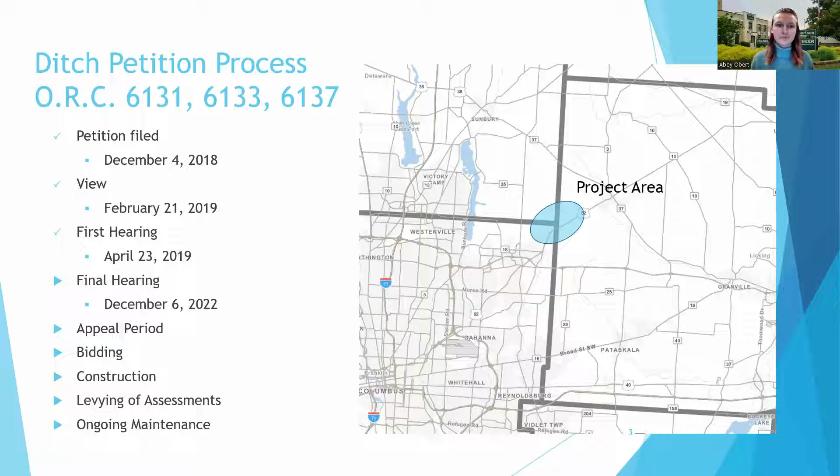So at the final hearing, the Joint Board is going to hear all the information, the final report, and the plans submitted by the county engineers. When this process started, Franklin County was appointed as the lead county on this, but all 3 counties have had equal input into this process. At the final hearing, landowners may offer testimony.

So it is in person, but there's also a virtual component. It is being held in the Franklin County Commissioners building in the Commissioners room. So you are able to attend in person and speak to the commissioners, or you can do it virtually, either way. After hearing all the information and the testimony from landowners, the joint board will vote to either approve the improvement, including the plans and the assessment schedule, or to dismiss it altogether.

And it's based on 3 factors, and these are all written in the Ohio Revised Code, section 6131. Is this project necessary? Is it conducive to public welfare? And do the benefits outweigh the cost?

So going into the components of the final report, this has been submitted to the joint board, and it's also on our website. So if you wanted to, after this meeting, go through and read what we've written, it's on the Franklin County Engineers website under public meetings, so you're able to do that.

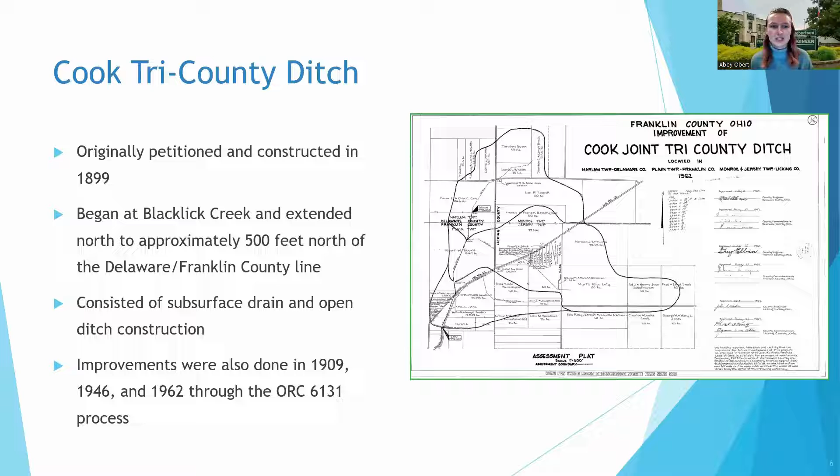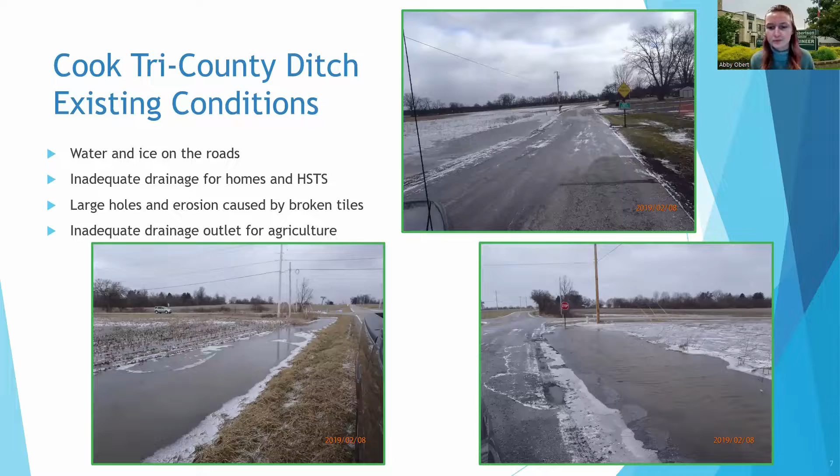So we'll get into what the plans are for each part of the project. Part one is pretty basic, including some open channel maintenance, some rock line channel construction, and the clearing of brush and vegetation. I've broken down the cost estimate for part one: the actual construction of the project is around $20,000. Project administration, survey, and engineering - this includes the design cost for part one - is around $6,500.

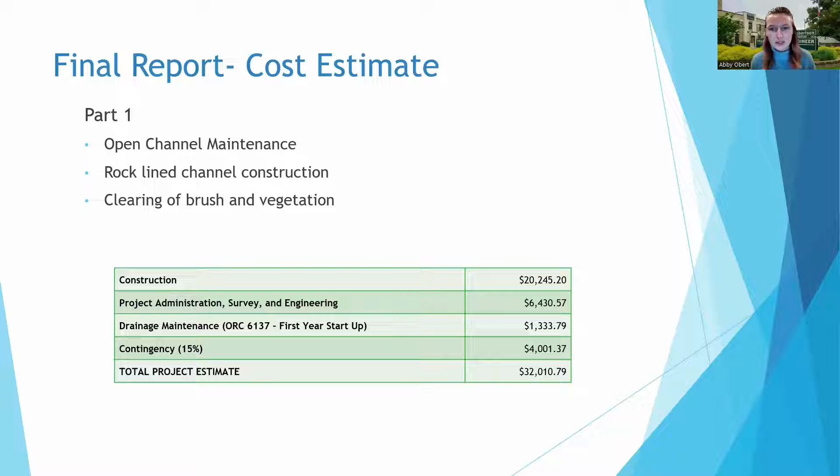For the second part, it includes surface drain reconstruction, subsurface drain tile installation, and the clearing of brush and vegetation. We're still looking at the same breakdown of cost: construction at $153,744, project administration around 27 or 28,000, the drainage maintenance funding set up at around 9,000, and then the contingency. So we get a total project estimate for part two at $217,997.02.

And from that, we have Delaware County being directly assessed for $11,405.70 directly within the county line road right of way - so the improvements happening within that right of way, Delaware is being directly assessed for. So the amount that's being assessed to the watershed is $206,591.32.

Just making you aware that Delaware County is being directly assessed for this, but since they are a public entity who owns land within the project, they are still being fairly assessed the same way that all of you are as residents. So while they are being directly assessed, they're also paying their fair share throughout the entire project. It's not that they're just paying the 11,000.

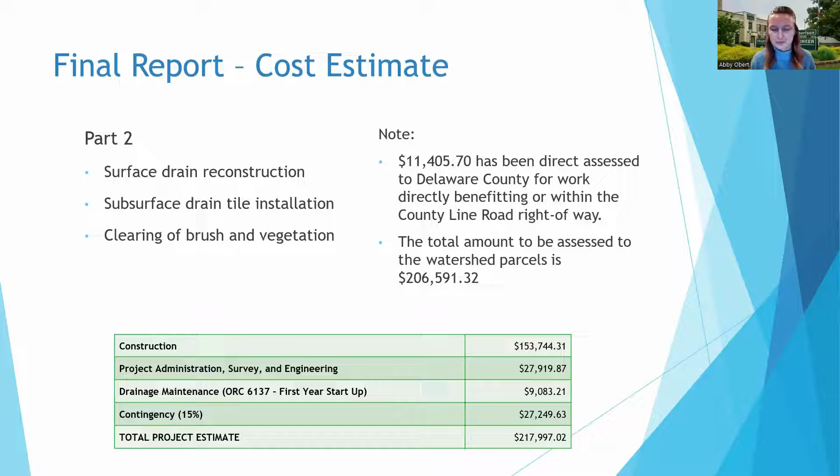And the same thing applies for Monroe Township.

So this is part three, the northernmost section. It includes subsurface drain tile installation, clearing brush and vegetation, private drive culvert replacement. Since part three runs parallel to Fancher Road, there are a lot of driveways where culverts will need replacement, plus road culvert replacement where we cross along county line, and then surface drain reconstruction.

As Delaware County was directly assessed, Monroe Township is also being directly assessed for work within the Fancher Road right of way. That is $8,500.80. So the total amount of the project comes out to $212,000, but the amount assessed to the parcels is $203,572.87.

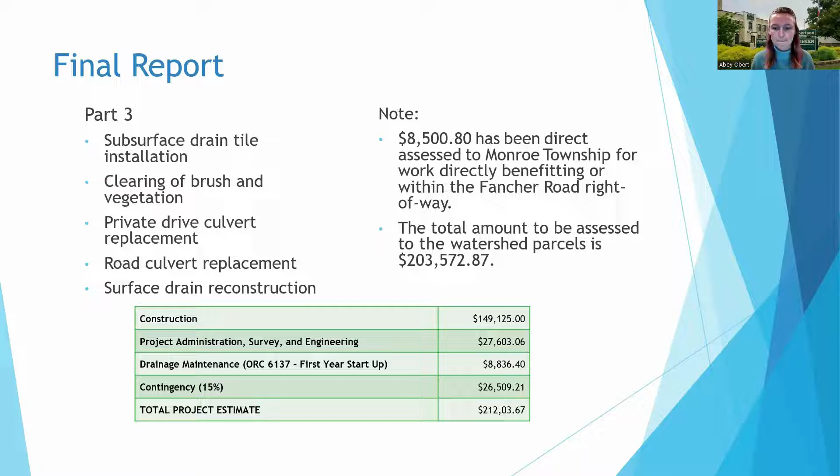So you're probably wondering how we come up with the assessments. Each parcel in the watershed is assessed a portion of the cost of constructing and maintaining the improvement. This is written in the revised code 6131 on how exactly we go about figuring out who is being assessed how much, but it boils down to just a couple things.

Property size, so how big is your parcel, and the percent of the system used. As I mentioned, people downstream aren't using the whole system, they're only using the most downstream end, whereas people on the northern leg are using the entire improved system.

Land use, so looking at whether it's residential in nature, agricultural, wooded, or impervious, including the right of way as well. And then how much benefit is actually being received from the project.

Assessment rates are actually up to the commissioners to decide, but we always recommend two semi-annual installments for up to 30 payments. That means the assessment total is being paid over 15 years.

And then there's the maintenance assessment that comes in under revised code 6137. That covers maintenance associated with the project.

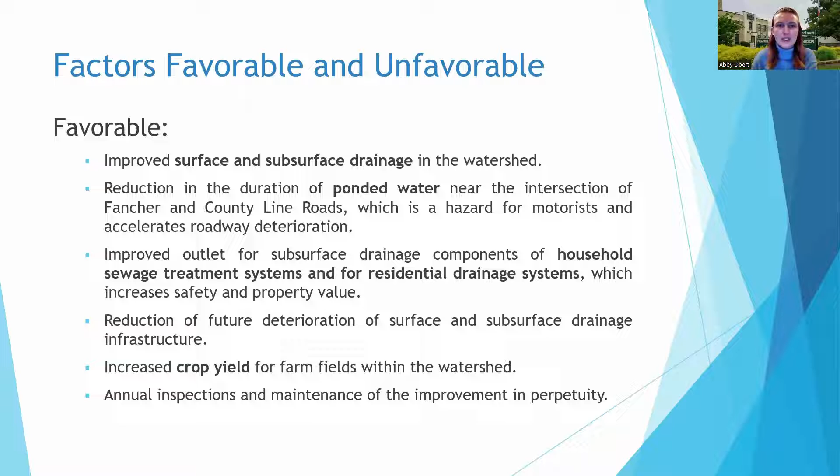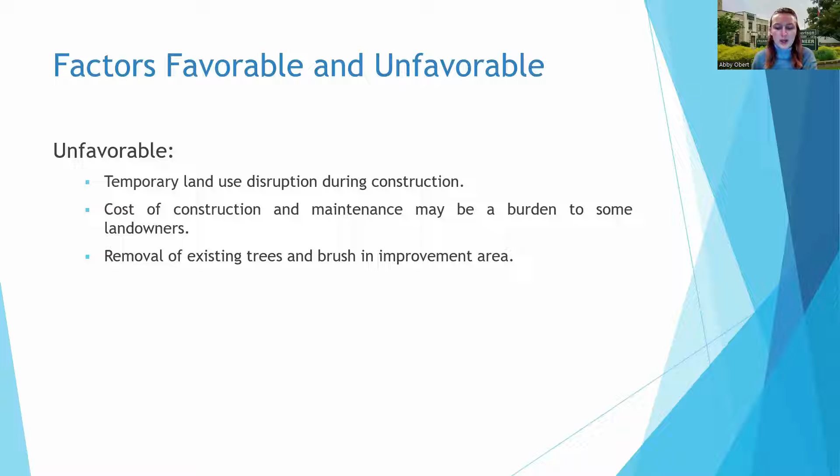Some unfavorable factors for this project would be the temporary land use disruption during construction. The cost of the construction and maintenance assessments may be a burden to some landowners, and would also include the removal of some existing trees and brush in the improvement area - going back to some of the scopes from the parts of the project.

Back to the benefits versus costs. A study from Ohio State determined that improving subsurface drainage increases corn yields by 24 to 39%, and increases soybean yields from 13% to 46%. So the improved drainage could lead to a potential average increase in profit of around $111,000 per year.

Increase in residential properties, communities with good drainage tend to have higher resale values. For new construction, developers spend on average $8,700 to attain adequate drainage. We have 71 residential parcels in the watershed, so this is a potential benefit of $617,000.

I keep mentioning the home sewage treatment systems. In order to replace a system that fails, it ranges from around $15,000 to $25,000 — that's a local price. Inadequate drainage can deteriorate the condition of your system. There's also environmental degradation, and quality of life and positive neighborhood perception of having a good drainage outlet and not having your property flood.

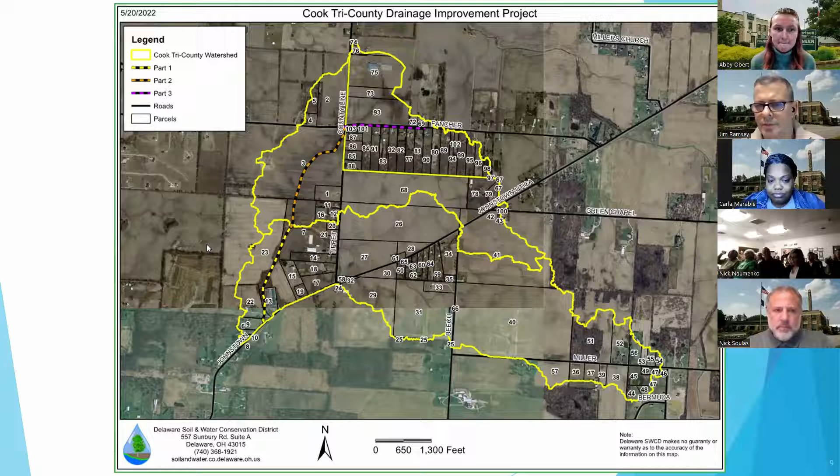So if I could say something here for a minute. One of the things to keep in mind is, and I apologize, I can't really hear clearly what everybody's saying, but I can get the general gist of what you're saying.

It's important whether you're in favor of the petition or against the petition to come and speak to the commissioners when they have the hearing, or to send your comments in writing and they can be read at that hearing. And you can participate in person or virtually.

Some of the things that I heard concern me, I'll address. The petition process is for private property owners to petition the county commissioners to make a drainage improvement. We didn't come to you and say, hey, we want to make this drainage improvement. Somebody came to us and asked for a drainage improvement and asked how they could do that because it's private property. So this is the process that's available for that. We told them that, and we are fulfilling our responsibilities under that law. So we're doing what the law says we have to do under that process when a private property owner wants to petition the county commissioners for that.

I can assure you that nobody on the staff of the Franklin County engineers, or in Delaware County, or in Licking County said to anybody that a petition was going to happen and the counties were going to pay for the improvements through the petition for that. That didn't happen. Not anyone on any of the staffs of any of those counties said that, I can assure you.

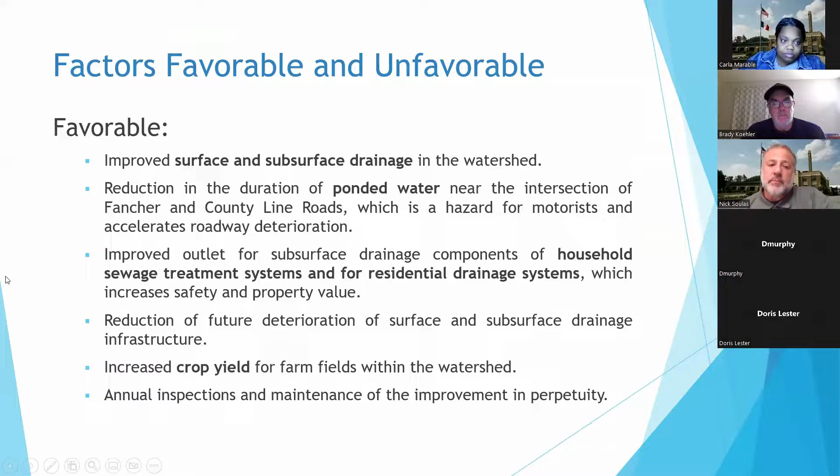But do we have any other questions about the process? Abby, will you put the slide up that has your contact information? Thank you. All right, because if you're in one of the other counties, you're also welcome to contact your county public representative as well. And we have a kind of a general public display on some website that goes through every property that's affected and explains why each property was assessed the way it was.

It seems to me, since this is a public meeting, transparency would require that every property owner can see what their property was assessed at and their neighbor's property. I think the neighbors have some concerns, understandable concerns, why some people are assessed so high and some people are assessed so low. I understand part 1, 2, and 3, but I'm hearing discrepancies in part 3 among different property owners. It seems to me that to make this as fair and transparent as possible, since you've done the calculation, you simply put on the website or some public forum: this is where property 1 was assessed and why, property 2 was assessed and why, and property 3 was assessed and why. I think if you do that, you may eliminate a lot of the concerns that a lot of people have.

So we could put up the spreadsheet that has the numbers on it. And then I wonder if there's a way we could show a different version of the spreadsheet that has the formulas on it. I will definitely look into that.

I agree, transparency is key. Right now we have the final report and the plans on our website, so you'll be able to go through the plans, see where your property is located and what improvements are in that area. So if you are curious about how we're going through your property, if we are, that's all on our website as well. But we'll work to make sure that those assessments get posted as well within the next couple days.

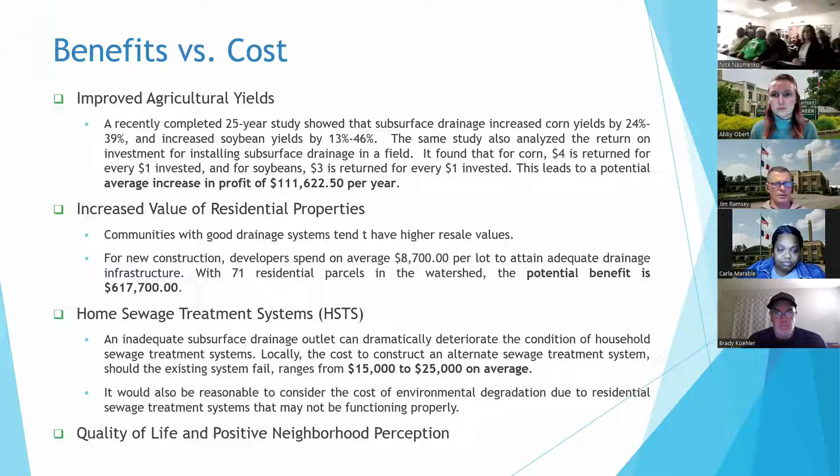There is, Abby, will you put the Zoom information back up? And we'll make sure that the Zoom link is also available on our website. There's one more question. Ma'am, go ahead, please. But before they ask that question, Abby, if you could just move your cursor and highlight the final hearing and the Zoom information.

Oh, my question. They might not be able to hear you very well. Do you want to come up front? Right here.

Basically, this project—excuse me, I've been trying for 30 minutes to get a question out here. Obviously, this is a financial burden for a lot of homeowners. However, I live on the corner of County Line and Fancher, and it absolutely is a problem and needs to be done. But if there's enough people that they decide not to move forward with the project, then what are the options moving forward? Because that intersection is a mess, that corner floods, the road's eroding away. So if it doesn't get approved for the third part of it, then what happens? Are there other options to get this completed?

There are no other options. This is the option. So you just live with the flooding?

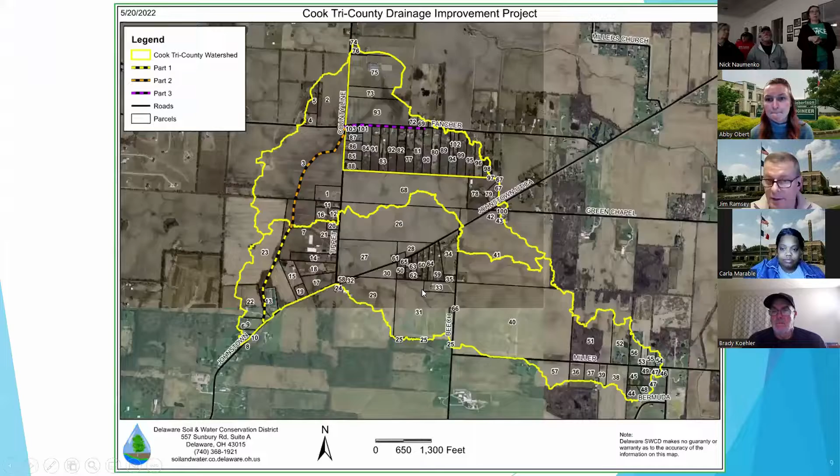So I'm just asking for expertise. If this doesn't go through, there's no other option other than to pass the cost on to homeowners. Not that I'm aware of, because it's an improvement to benefit private properties.

And particularly in this situation, where it lays in the landscape and the political boundaries—Franklin County is not going to go and build an improvement to benefit residents of other counties, and the other counties are unlikely to go into Franklin County and build an improvement to benefit their residents. This is the process that is set up to deal with this kind of problem. It's the best we've got, and it's been the same process in Ohio for a long time.

I heard someone say you guys have been through this lots of times, right? Actually, we haven't. We've done a few. I think Licking County does them very rarely. Probably Delaware County is more experienced with them. So it's not something we do absolutely routinely. It's a challenging process, and we get it. I don't think you're going to find anybody on our staff that doesn't wish there was a better way. But there isn't a better way. This is what we've got.

So I wish I had something better to tell you, but I don't. So if it doesn't go through, they just don't fix it? They just let it continue to flood? Is that it? Yeah. Okay, thank you.

One more question, I just wanted a clarification. You talked about the assessments—if this agricultural property is improved upon and built up, whether it's a shopping center with a huge parking lot or whatever, and it changes the drainage, did you say that all the assessments would be reduced or adjusted because that entity putting more water into the watershed would be charged more? Is that the way it's going to work?